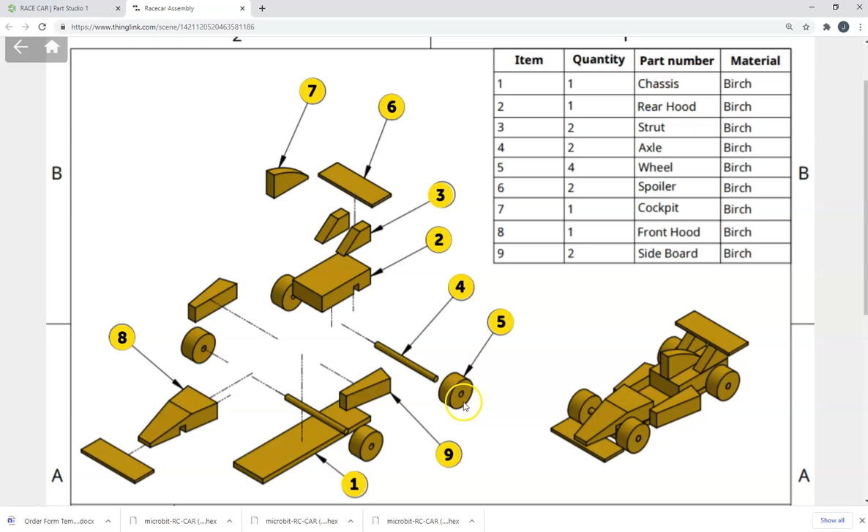It is also a simple extrusion with a continuous thickness, and it's just a four-sided figure that we will be able to model. Let's check out the multi-view drawing for it. We can see here that we have a four-sided figure extruded at a uniform thickness, so this should be a pretty straightforward part.

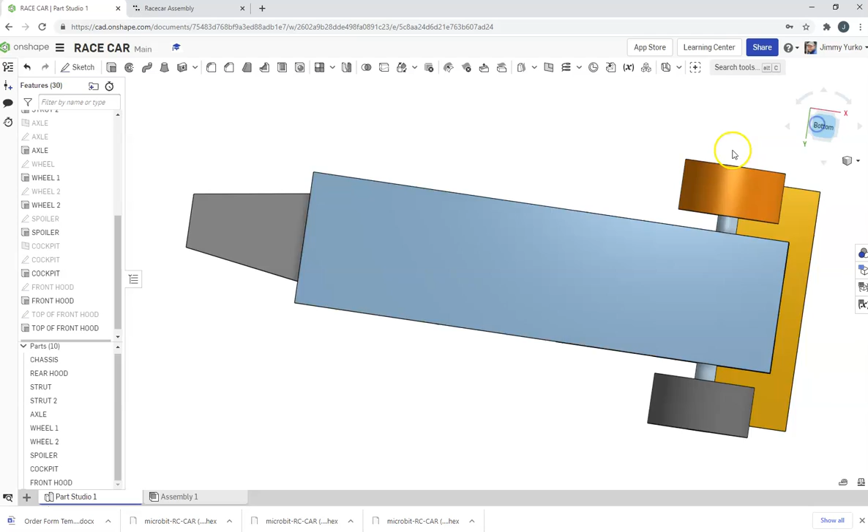Let's head on over to the model and go ahead and create that. I'm going to create it from the bottom. Take a look at this from the bottom view. When we draw it, we're going to wind up extruding it from the bottom towards the top. We want to line it up somewhere in the middle here. We'll modify it as we work.

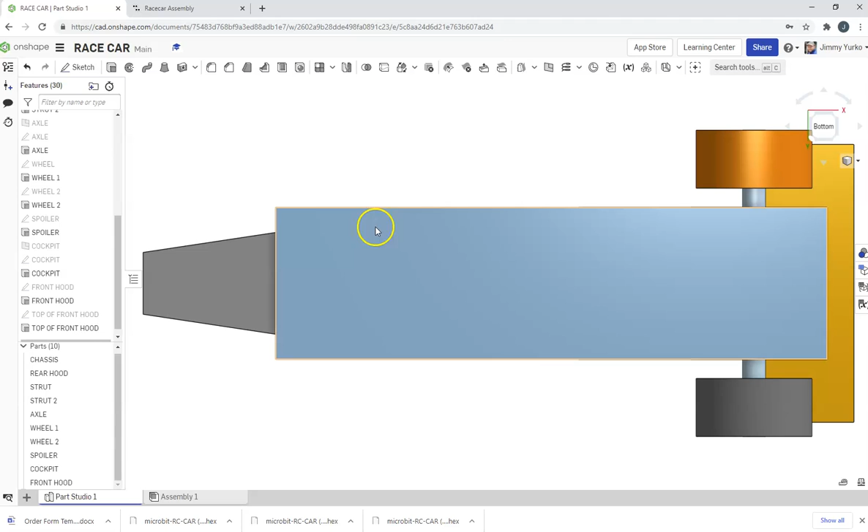We're going to produce a sketch on the bottom of the chassis. Identify the bottom chassis as sketch plane. We'll call that sketch sideboards. Then we will use our line tool to produce the sideboards in accordance with the drawings.

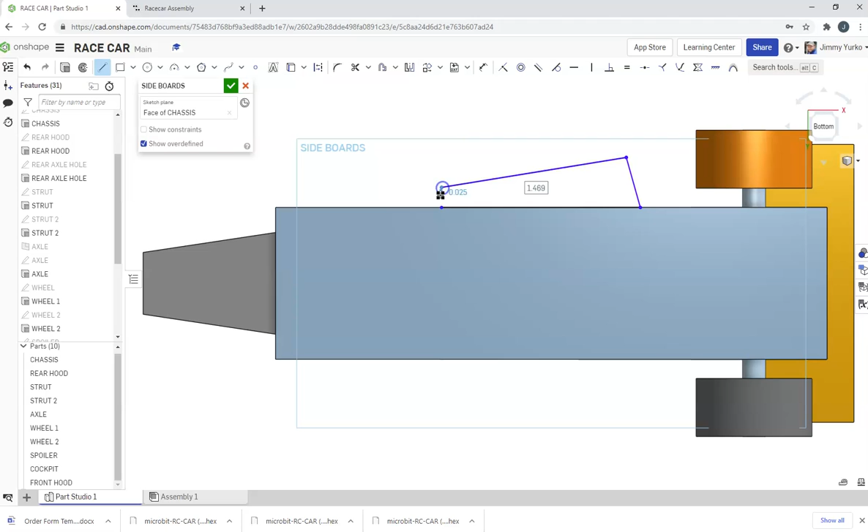I think that's about right. Let's double check. Yep, that looks right. Just double checking. All right, awesome.

Now we're going to also create a mirror line, because later, once I get the dimensions in, I want to copy this so I don't have to do it twice. And I'm going to make that mirror line a construction line.

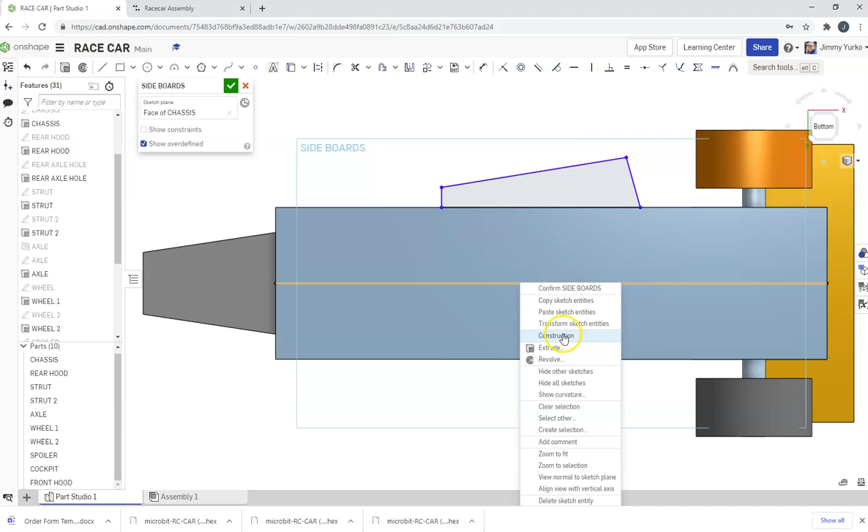So let's go ahead and add the dimensions. Overall length of that part is 1.670 inches, 1 and 670 thousandths. So from this point on the object to this point on the object is 1.670 inches.

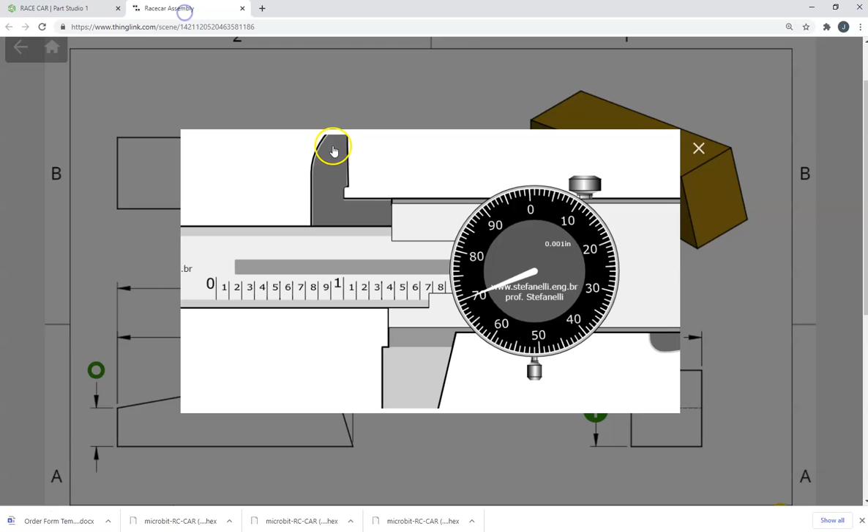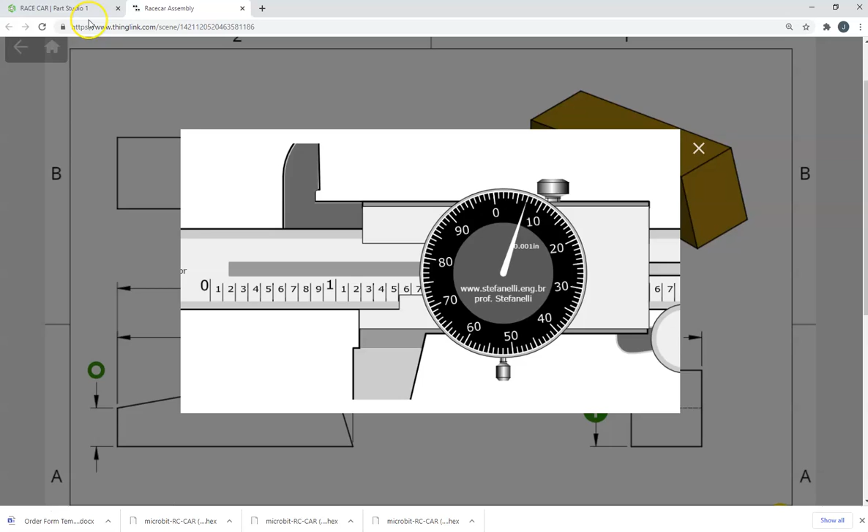The next thing we need to know is the length from that same base datum point to our highest point, our second longest measurement of the model. And that is 1.507 inches - 1 whole inch, 5 tenths, 0 hundredths, 7 thousandths.

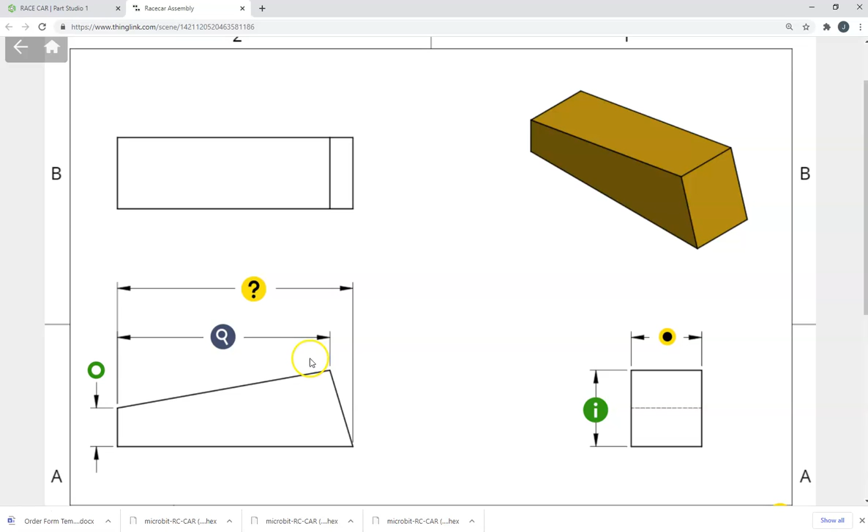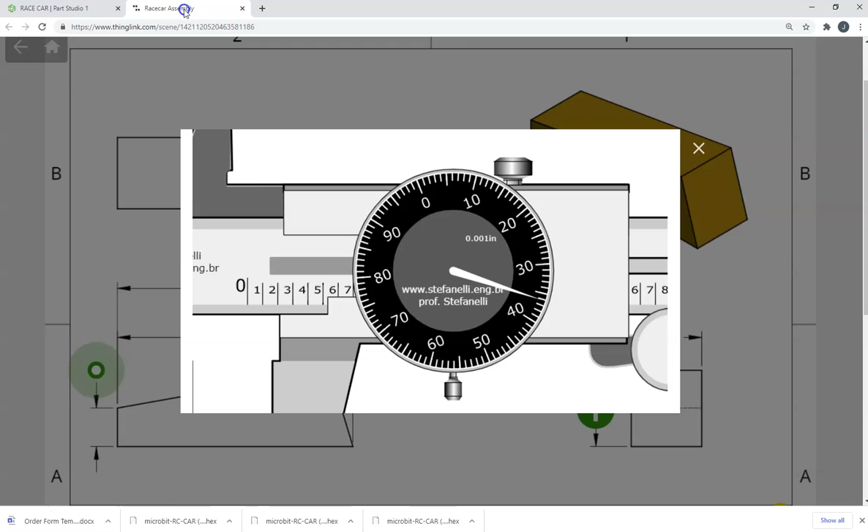And the height of the front end is, drumroll please, 270 thousandths, 0.270. There you have it, so that is the sideboard.

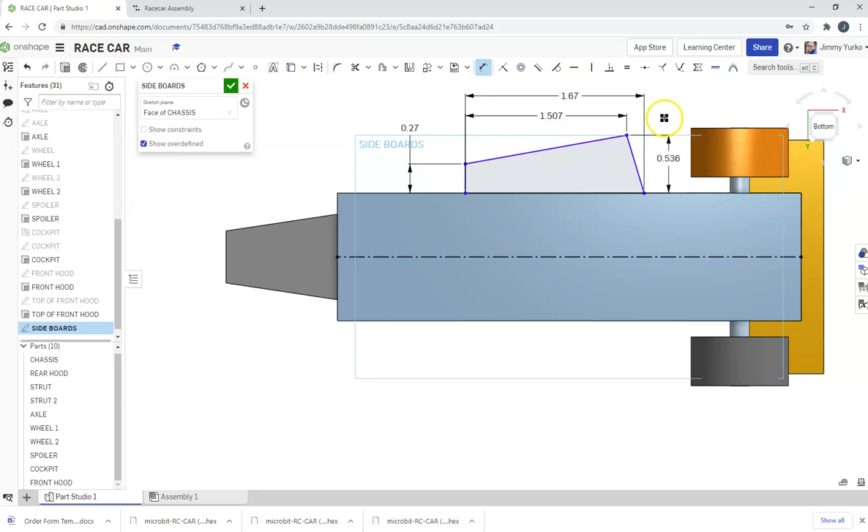Now we're going to need 2 of those, so let's go ahead and mirror this. We made the center line, so we're just going to go to the mirror tool, and we're going to identify that center line as our mirror, and then identify all the entities that we want to mirror. That's it, that's all she wrote.

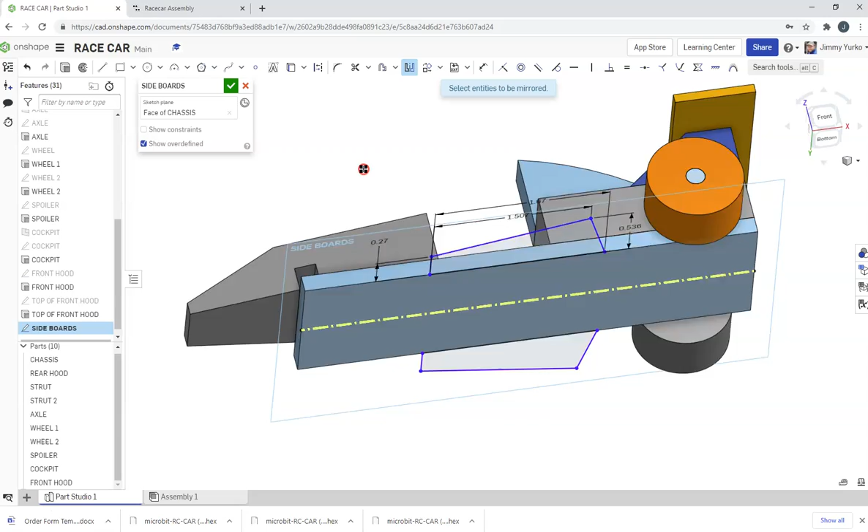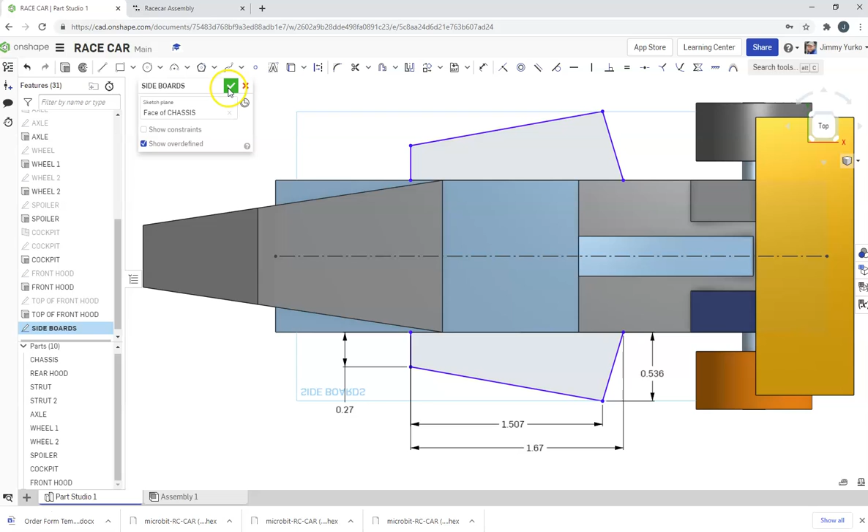Did we do that pretty good? Yeah, we can do that pretty good. We can slide the whole system fore and aft - they don't give us dimensions in the model as to how far fore and aft this needs to go, so we're going to go by eye. Close enough is going to be good enough. If we need to come back and change it, we can. That looks pretty good to me. Just hit the green check mark once you're happy with the location.

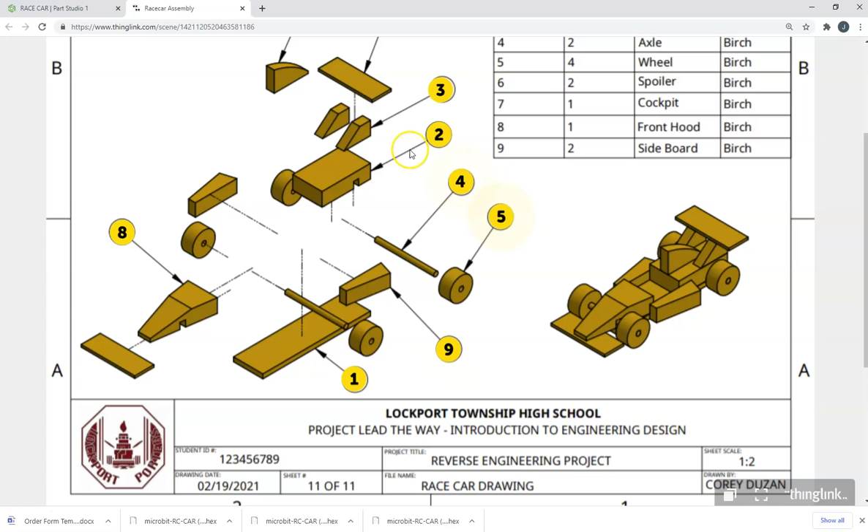Now it's a matter of extruding the two parts. Hit your extrude button, tap the two areas that you want to extrude. I'm going to call those sideboards. We need to extrude them a distance, a depth, which we haven't measured yet, so let's see what that is.

That depth was 500 thousandths on the nose, 0.500. And hit that check mark. Let's go ahead and name those - rename those sideboards 1 and sideboard 2.

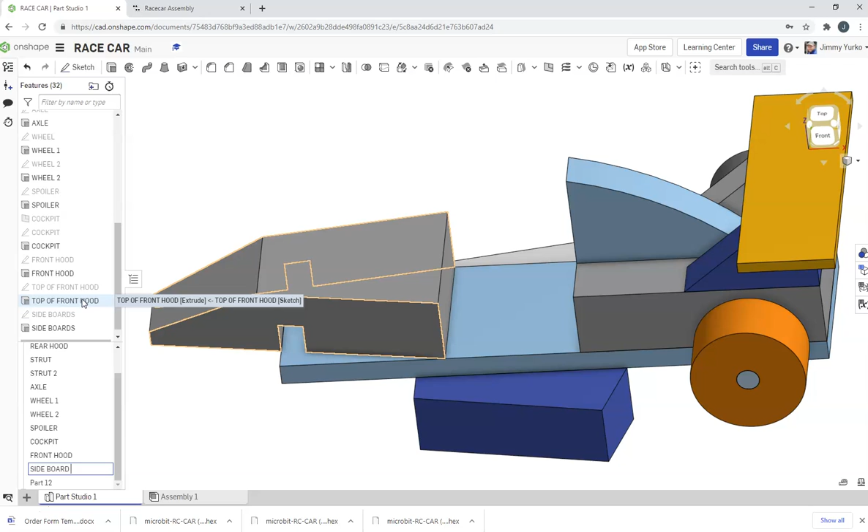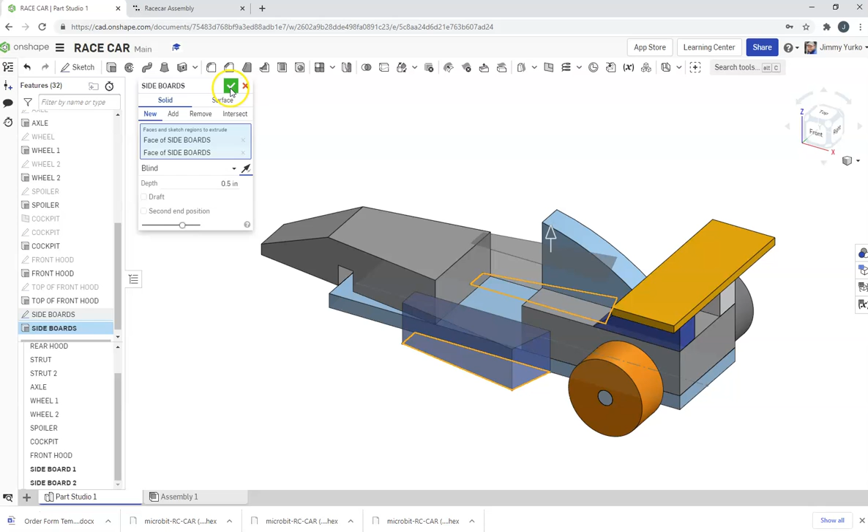Oh look, we made a mistake. I'm sure you can see my mistake. So do I have to start all over? Heck no, no biggie, mistakes like that were easy ones. Let's go back and just double click on sideboard and change the direction arrow. And that's all she wrote.

Now we can go back, add the front spoiler just like we added the back spoiler, add the front axle just like we added the back axle, and add the front wheels just like we added the back wheels.